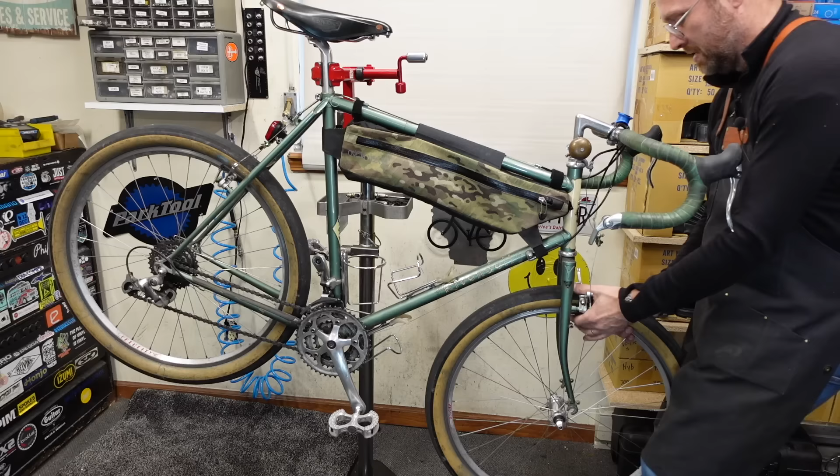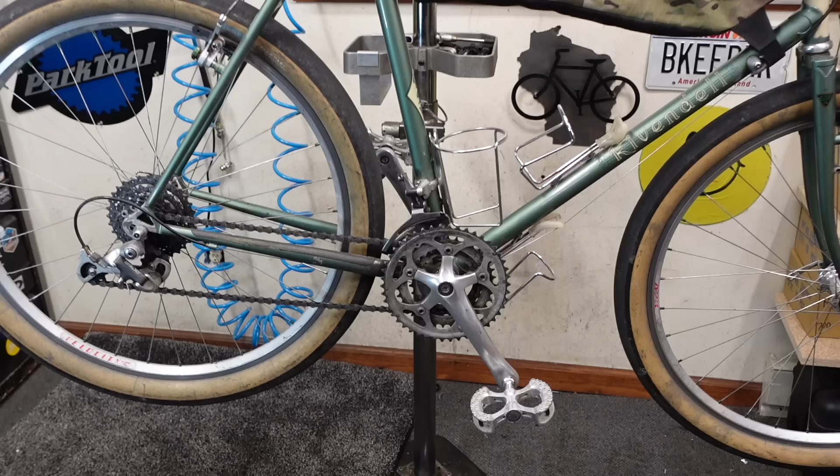So what we've got here is my 1996 Rivendell All-Rounder. I know I say this about all my bikes, but I think this is the coolest bike I have. All my bikes are super cool, but this one is really special to me.

This is the bike I've been using for touring, but it's built with very thin-walled, lightweight Reynolds 753 tubing. I think it's really cool that in the beginning of Rivendell, Grant Petersen wanted to continue to develop the Bridgestone XO1, and the All-Rounder is that bike. Essentially, it's a road bike built on the 26-inch mountain bike platform, so the geometry is pretty goofy on it.

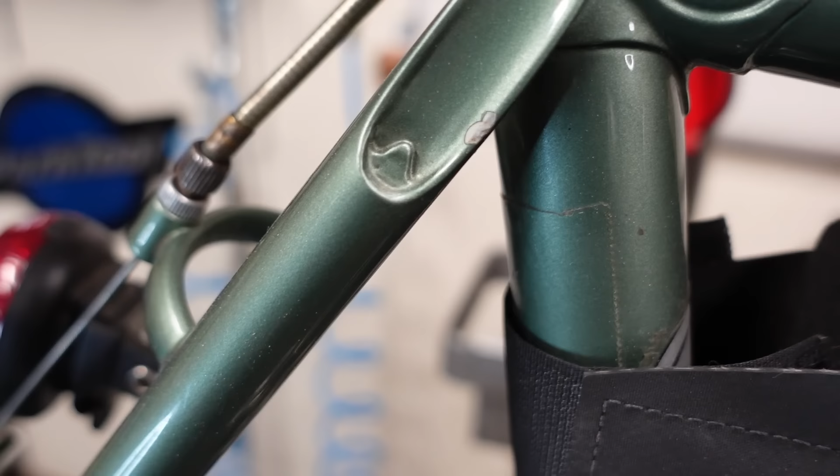I've got Rene Herse Rat Trap Pass 26 by 2.3 inch tires on it. These things float like a butterfly. This bike stings like a bee.

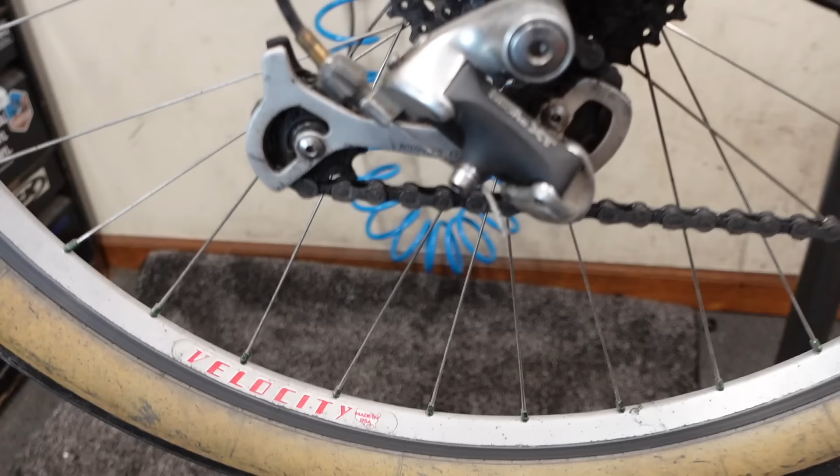However, due to the very thin tubing, it doesn't make the best touring bike. When I've got this thing loaded down, and if I get off the road, or even when I'm flying down hills, it gets a little noodly.

Many of you probably watched the video of me riding in the Black Hills, and this is the bike I did that ride on. It was fine, I got through it, but when I got off on that horse trail, I think if you listen closely, I even mention it. I just felt like I was stressing it and felt like I was gonna break something, and it just wasn't doing what I needed it to.

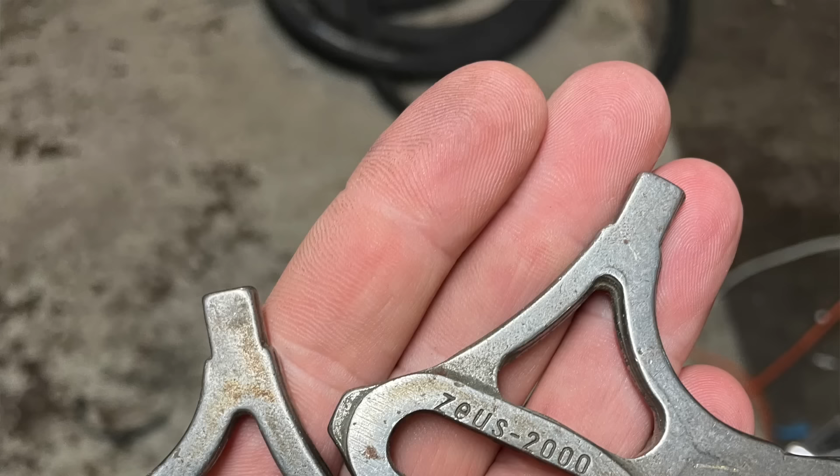So at that moment, I made up my mind that I'm gonna build an exact replica of this bike, only with oversized mountain bike tubing. So that's exactly what I did. I ordered a tube set and a bunch of lugs. I had some really cool Zeus 2000 rear dropouts sitting in a box that I found.

It's not a whole lot I'm gonna change. I have decided that I'm gonna increase the rake on the fork. Let's see if I lift this up, you can see this is a very sexy fork with this really subtle bend. I'm gonna give it more of a French bend and kick it out. So this is a 38 millimeter rake, I'm gonna kick it out to 45. So I'm actually subtracting 7 millimeters of trail.

That should help the bike handle a little bit better when I've got a front load. I'm gonna put some bags up front and a bag on the front rack. I think this is gonna be my main gravel bike after that.

So I'm gonna take these fenders off, I'm gonna take this front rack off, I'm gonna keep this bag on here. I might take the bag off for now, but it's gonna go back on the bike just because it looks so cool. But I'm gonna kind of strip this thing down.

I don't know if I'm gonna strip it all the way to the frame. It would help to have the frame up in a stand so I can measure things and make sure that I get my build right.

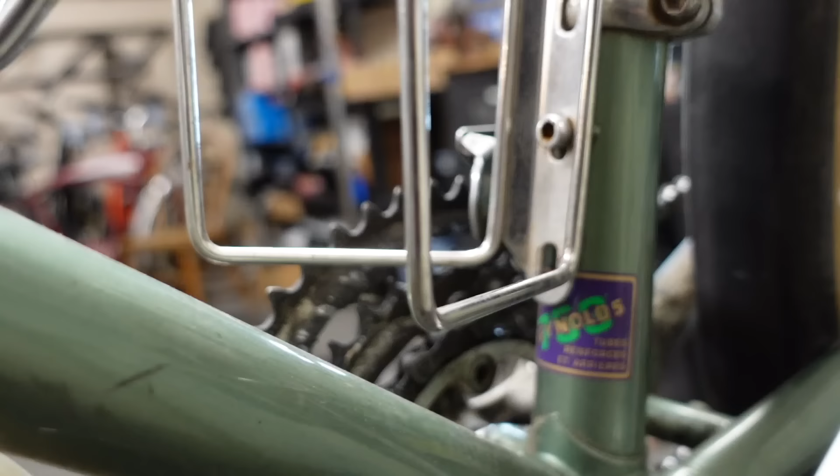But I've done a pretty good job of redesigning this bike. I went back to the original Rivendell readers, I think it was Rivendell Reader number 2, and I found the page with the geometry chart for this All-Rounder. I plugged all that into BikeCAD and designed the bike. I've got a nice digital drawing of it, and with that drawing, I can make a full-size drawing.

So this video is gonna be about me making that drawing, taking this bike apart a little bit, and setting up the jig to get started on the build. This is just the very beginning, first steps, like when you're thinking about building a bike, the planning, all of the effort that goes into designing the bike before you start mitering tubes and tacking things into place.

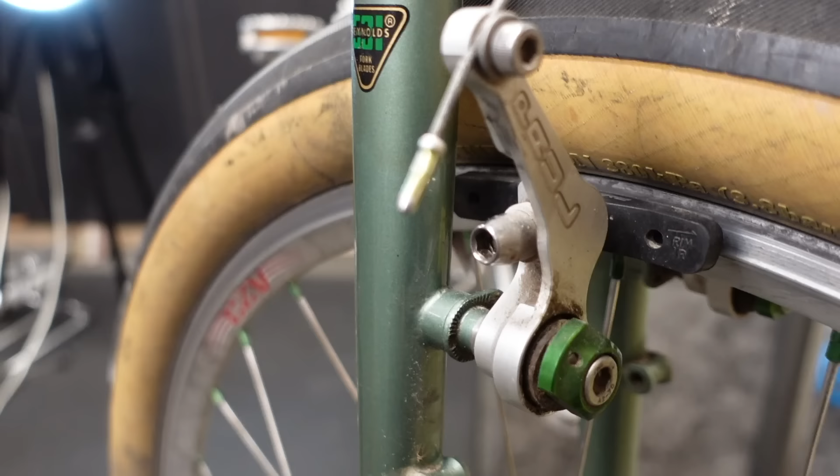I'm by no means a professional frame builder, I'm a hobbyist level frame builder at best. This will be my 3rd complete bike, my 5th attempt at a frame. I make a lot of mistakes, I learn as I go. This is a big undertaking for me, it's always a big undertaking for me to build a frame. So sit back, relax, and come along for the ride.

Get my lock off of here. Love these locks. Disconnect the brakes and pop the wheels off.

I think these super fancy Rene Herse fenders have to go first. Take those off, I think they're gonna go on the new bike.

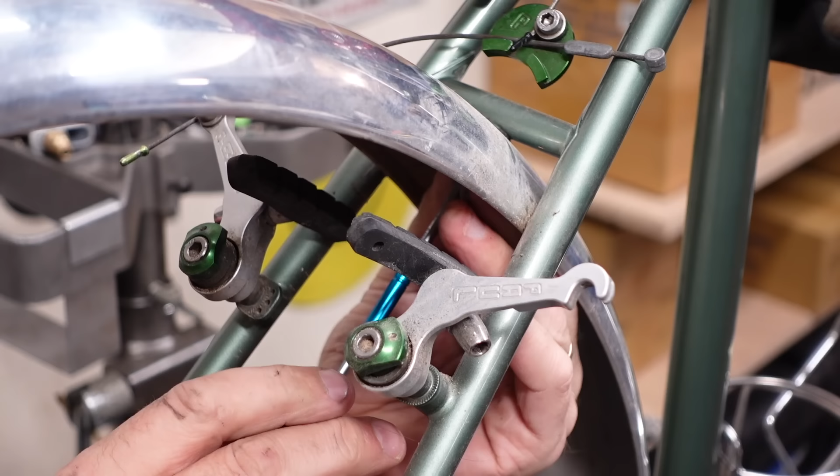All right, I gotta take my little problem solver bow tie guys off here.

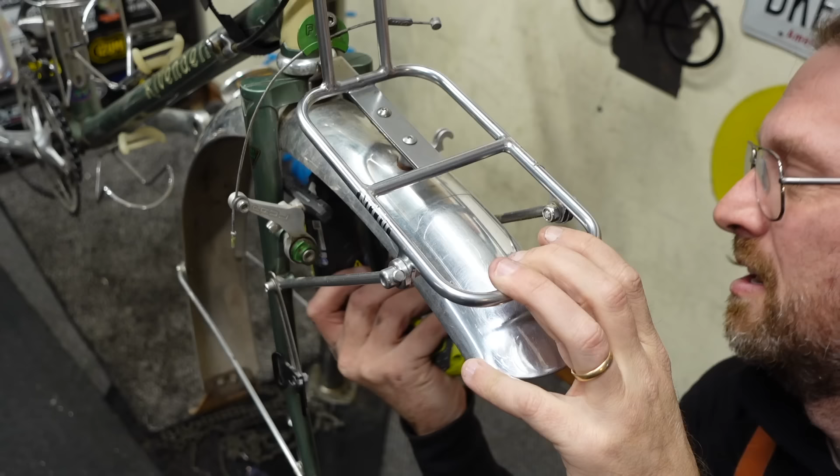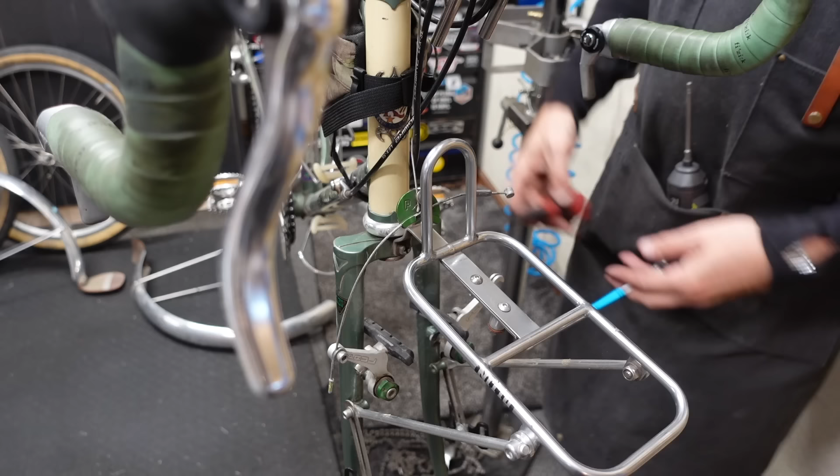So this bike wasn't really set up to be taking a front rack, or at least hauling a front load. It's got a pretty high trail, and I just don't think I'm going to be carrying a front bag on it anymore, so I'm taking the front rack off.

I'm hoping to build a custom rack for the new bike. Got all the stuff for it. We'll see, but this one would certainly do if I don't get around to it or I mess it up. Never done a rack before, so I'll hold all the hardware together so we don't lose it.

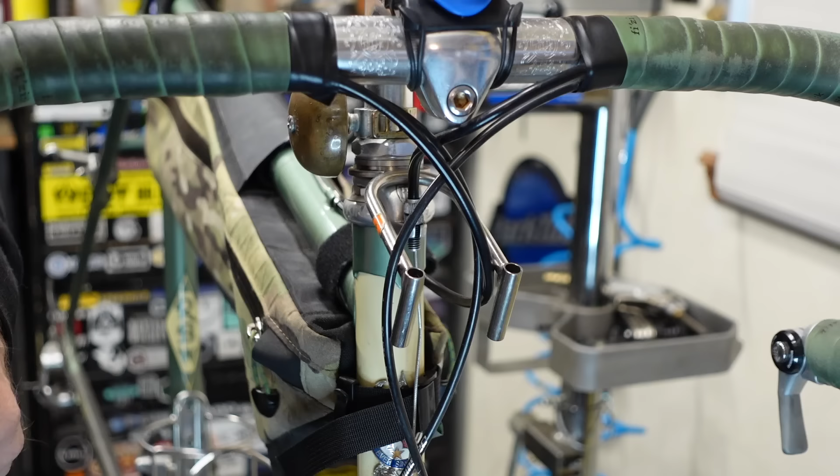If I don't have the front rack, I don't need the decaleur, so we'll try to get that off. Oh yeah, these cables are really short. Oh, of course, the Technomic stem - very long stem.

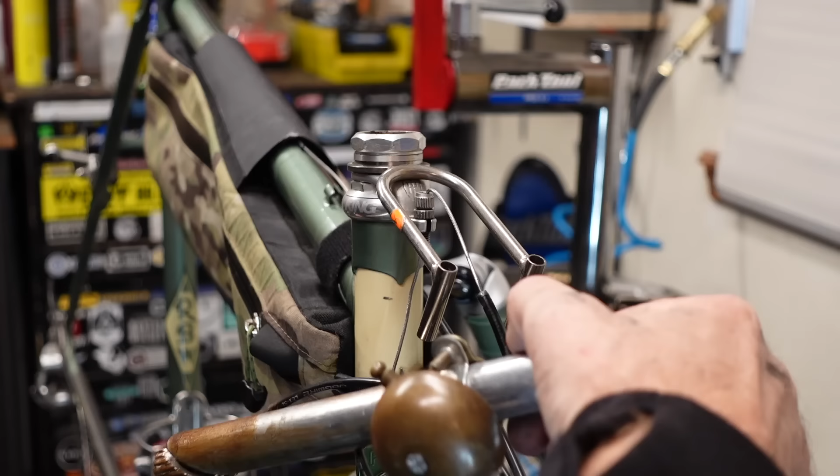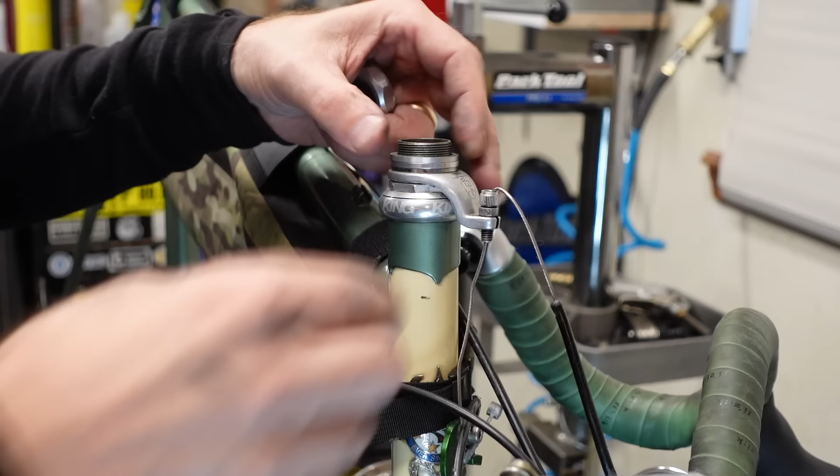I'm gonna need a spacer. All right, I couldn't find a keyed one, but I found an unkeyed one. I'm gonna put it in between the keyed ones. I don't know if that makes sense or not, but that's what I'm doing. Why not?

All right, that simplifies things quite a bit. Get this bike back into its more natural state as a lightweight all-rounder. It'll certainly look cool with the fenders on it, but I think it almost looks cooler without - it just looks sportier.

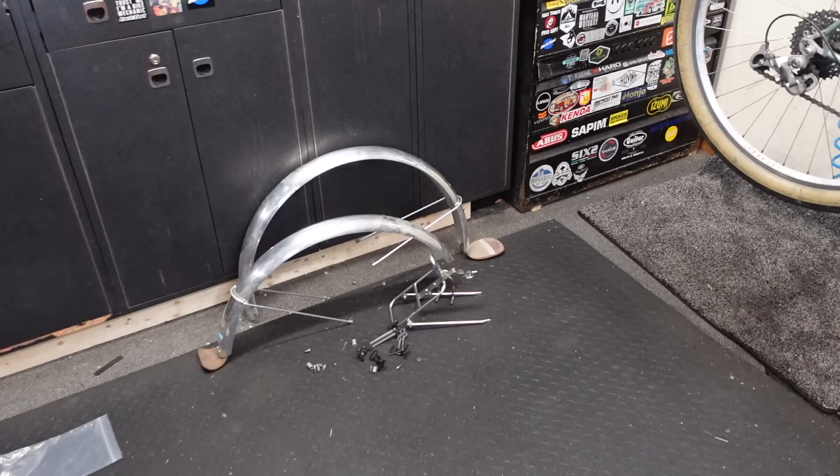Well, as long as I don't have to stay overnight and the weather ain't too bad, that's a pretty spry gravel bike now that we've got all of the touring bits off of it.

Here I have the original order for that bike right there, so we know it's from 1996 - that's pretty cool. And then I got it October 27th, 2019, so I've had it about 4 years.

I'm gonna open this up because I have my geometry chart there. Oh, hi Moon. So this is photocopy, volume 0, issue 0, and this is Grant explaining how he's launching Rivendell after the closure of Bridgestone America.

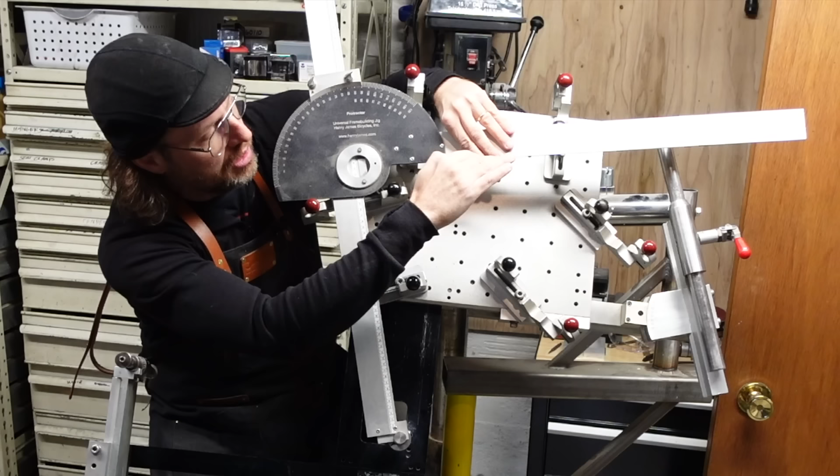And we've got this big old protractor here that fits on it, and if we loosen it up, everything kind of slides and you can get your angles this way too. So once we find our 72-degree seat tube, then we kind of know the horizontal tube, the top tube, and get those lugs set.

Once you get everything measured that way, you can set your brackets to get it in the rough position and start cutting tubes to length. Now what I like to do is mock up the whole front triangle, get all the miters cut, and make sure you get a good fit on everything before tacking in those first few tubes and building that front triangle. So I think that's what we'll start with. We'll get the bottom bracket in here, get the head tube cut, and start getting angles and things set up.

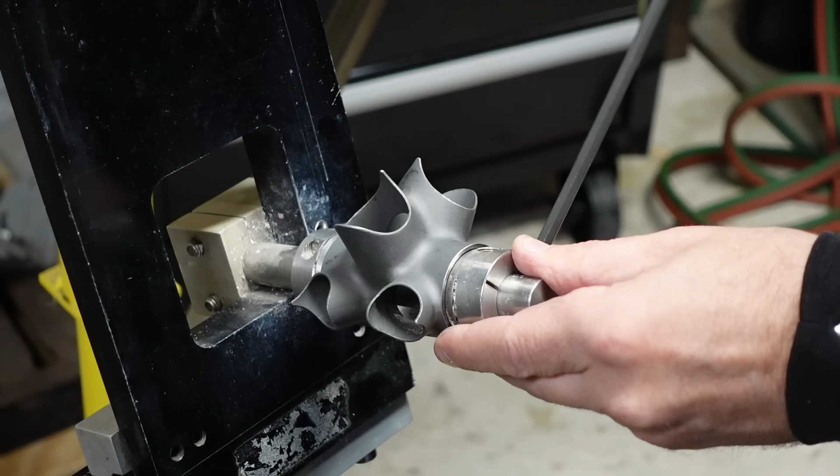Maybe mock up a few tubes - I have some scrap tubes. Sometimes I like to do that just to get things close and start dialing in the setup of the jig before we actually start hacking our real tubes and making some miters. So I just had a frame in here from a botched project that we're not going to talk about anymore. I think that this is actually in a really good spot - should be the same bottom bracket shell. They're just kind of wedges that are held in there. I'd like this bolt to be accessible from over here, so it's press fit in there and then tighten it down. It's not going to move one way or the other, but you can still kind of twist it.

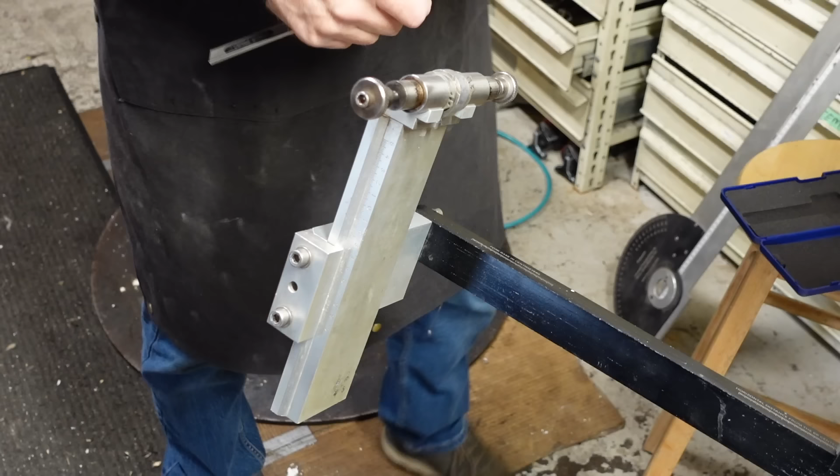Another fairly easy thing we can do to set up real quick, we can get the rear axle spacing set up. Zero this guy out and measure. All right, we're at 133, so that's really close. We want it 135. I think this screwdriver works - just a quick adjustment there. Measure it one more time. It's 133 or 134, try that. 135.2, it's got a little bit of a wiggle to it. Close enough. And then we'll dial these in a bit.

These are the dropouts I'm using - these are cool old vintage Zeus dropouts. I don't think I've ever seen a pair. They're Googleable, they're not that rare, but certainly a unique thing to this bike. Nobody's got Spanish dropouts on their adventure bike. Nobody but the bike farmer, at least.

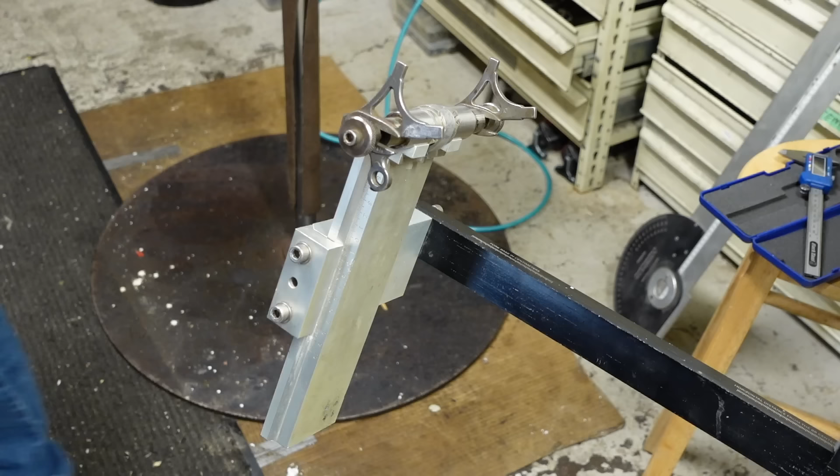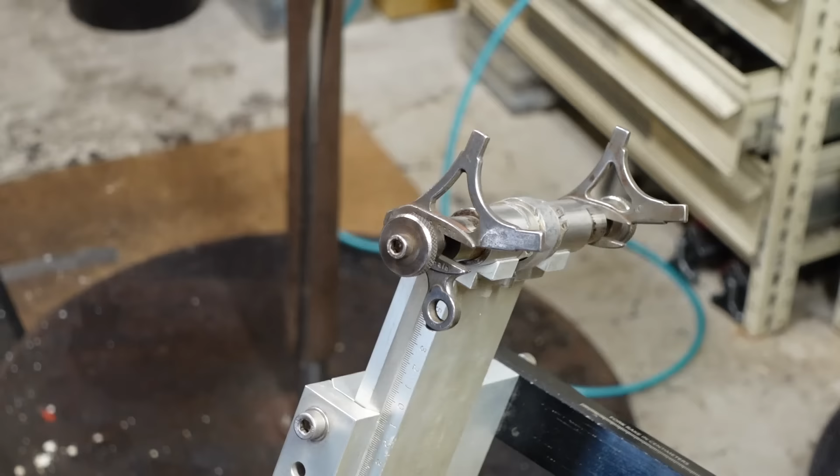And then we'll set our bottom bracket drop, which on this bike is going to be a whopping 45 millimeters, according to my drawing. So there's a little groove right here and then a gauge, and that is set at 45. So that's the bottom bracket drop, which means from the center of the rear axle to the center of the bottom bracket, there is a 45 millimeter vertical drop.

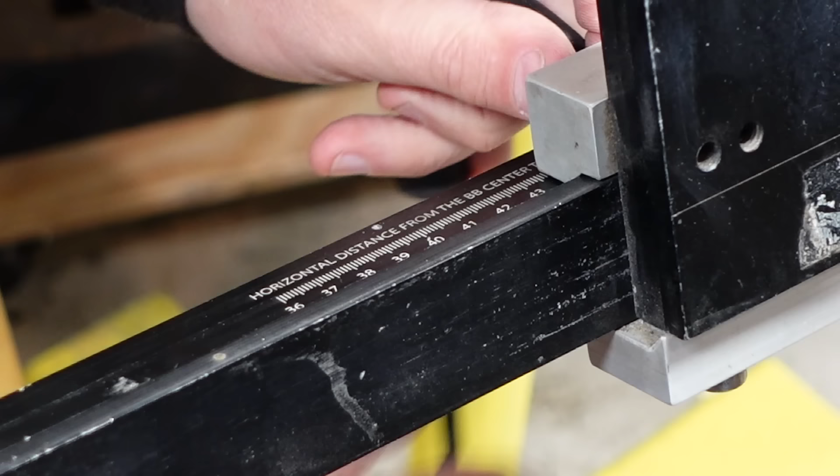Okay, and we can set our chainstay. So the chainstay length is here, horizontal distance from the BB center to the rear axle. For some reason I don't trust this one, so I'm going to measure it manually as well, but I'm going to go off the gauge to get started. We want this to be 42 and a half, which I'm showing is right there, if that's actually my mark. Like I said, I don't really even know how to use this thing, but it's good enough for who it's for.

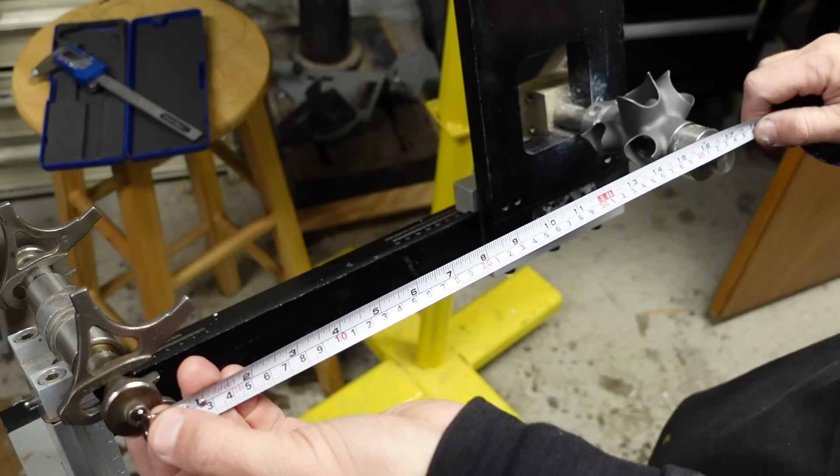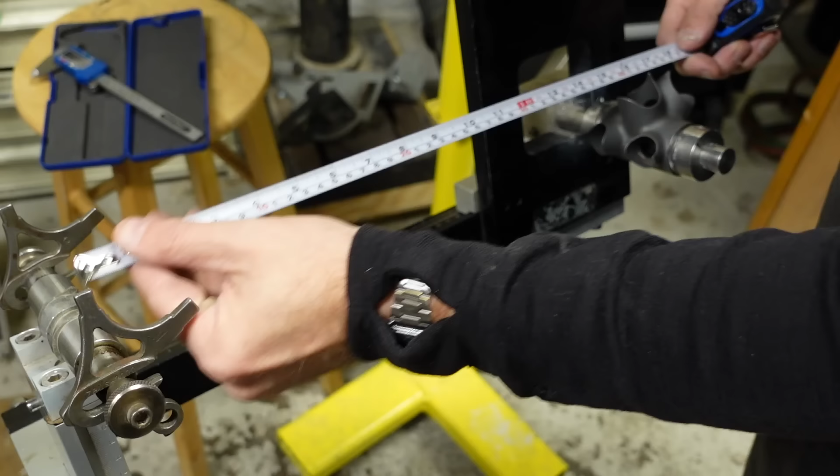So this is the distance we're going to measure - go from the center of that bolt to there. Yeah, so if I measure like that, I mean it's close but not quite. It's measuring like 43. What if I do center there? Yeah, it's probably right, pretty close. We'll double check that as we go too - we might find some clues along the way.

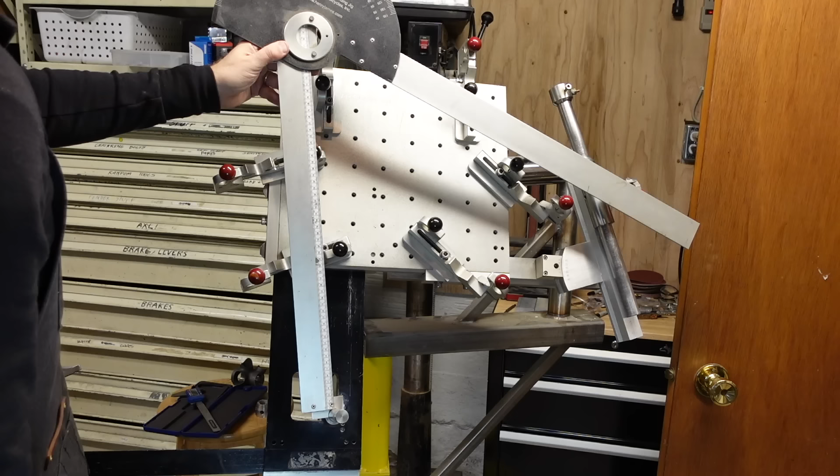Okay, we're going to make some - back this up a little bit here, take the bottom bracket out. Play with this thing a little bit. So let's see if I can make sense out of this. I'm going to go with, I think it's 58 and a half - so that's 58 and a half from the center of the bottom bracket to the center top tube. And then we've got to set the angle here, it's 72. I'll double check my drawing quick. Yep, 58 and a half - yeah, it looks like center to center. So we'll take this off for now. I'm going to take all these red guys off.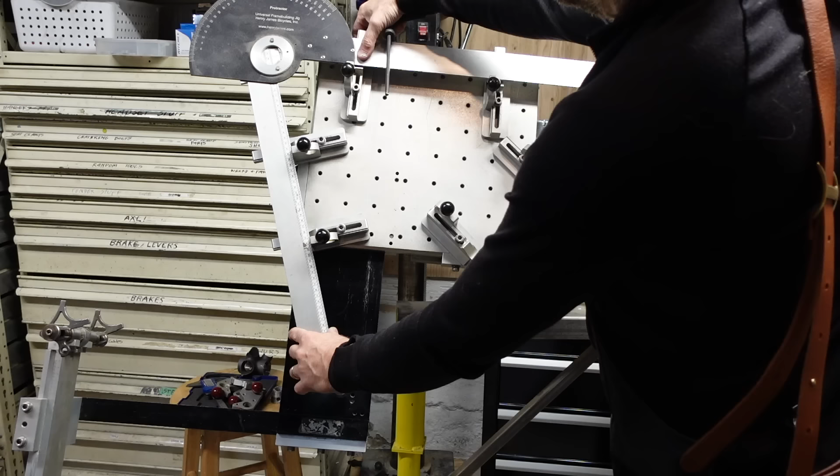All right, so now put our jig in here. A little bit of futzing and finagling. You can rest your top tube on that, and then your seat tube angle should be right there. Kind of get things as perpendicular as possible here. I think that's getting closer. Okay, seems about right.

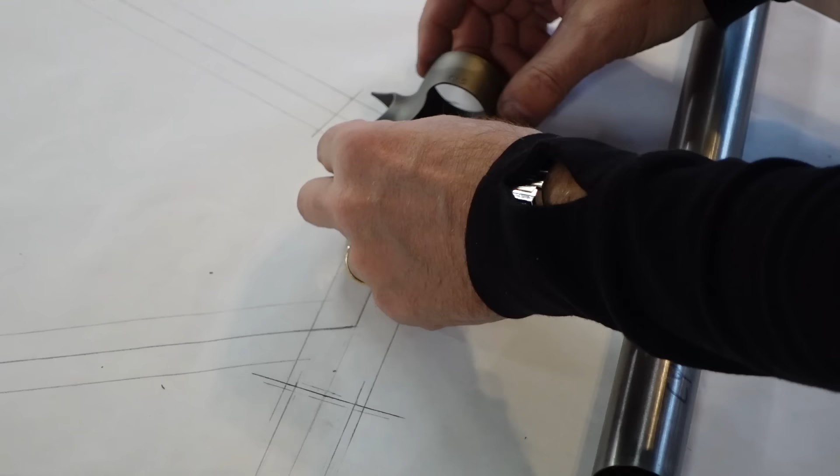Okay, over here on the drawing, we've got our head tube. And that's our head tube. You can see it's way bigger than it needs to be. I'm just gonna kind of double check the drawing just to be sure. I'm kind of eyeballing the lugs here, making sure that I'm going from the right lines. Things are gonna pan out for me.

I can always face it down a little bit. So I wanna cut it just a tad big, but that's where those go. So my lines are fairly accurate.

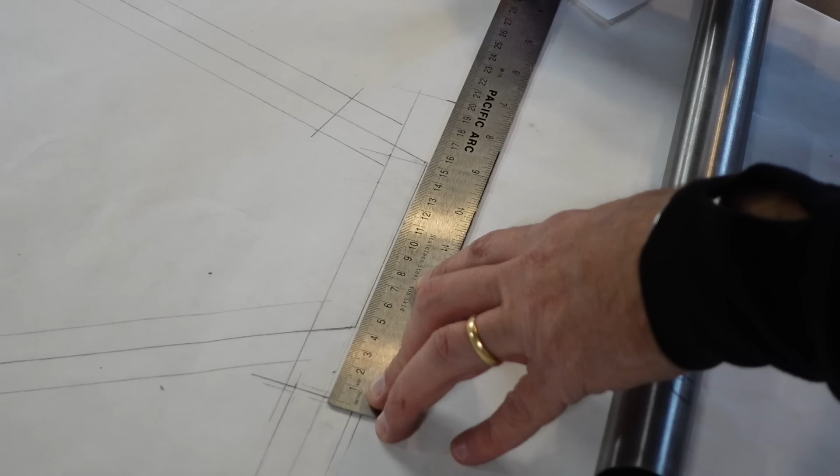And so I'll line that up, and I'm measuring. If I add a little bit to either side, I mean 120. Nope, that's not right at all. 200 millimeters is gonna give us a good millimeter or two on either side to face down at the end. So that's what I'm gonna do. I'm gonna go with 200 millimeters. Plenty of head tube left over if we mess it all up.

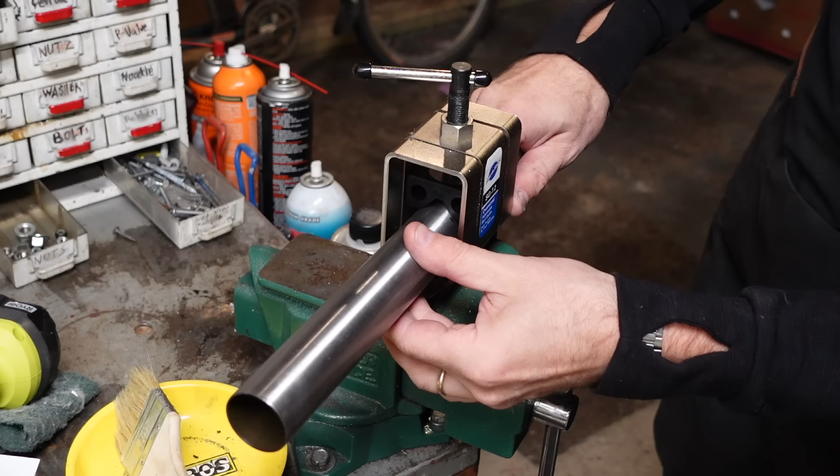I'm gonna mark right on 200. So, I gotta find my mark. Get this in here, get my saw guide. I think that's pretty good.

I take the easy way. Yeah, it's right on the money, right on the mark. Okay, go clean that up.

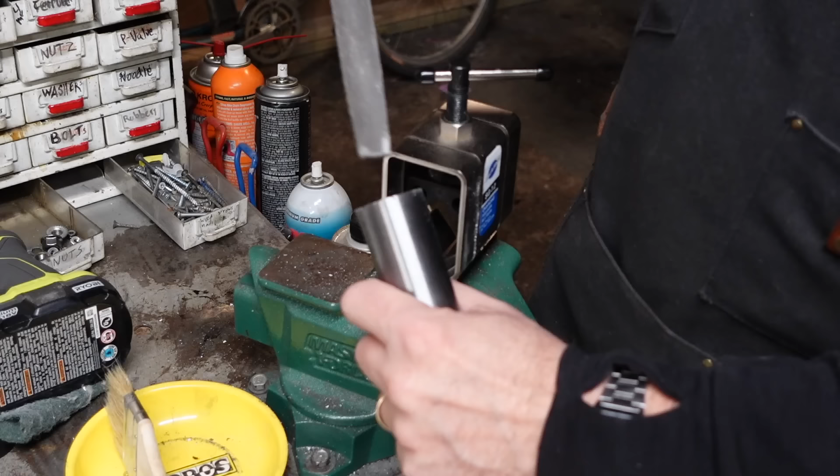Ooh, fits like a glove. Like I said, I have some extra tubes and kind of things sort of aligned.

How about we do this? Lock it down that way. So this whole thingamajobber goes up and down, right?

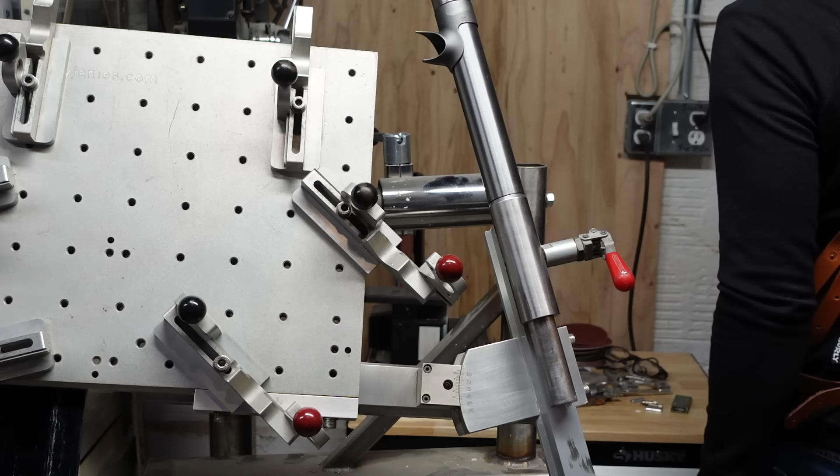We know this flat right here is gonna rest our top tube from our big protractor guy. All right, so we can slide a dummy top tube into that lug.

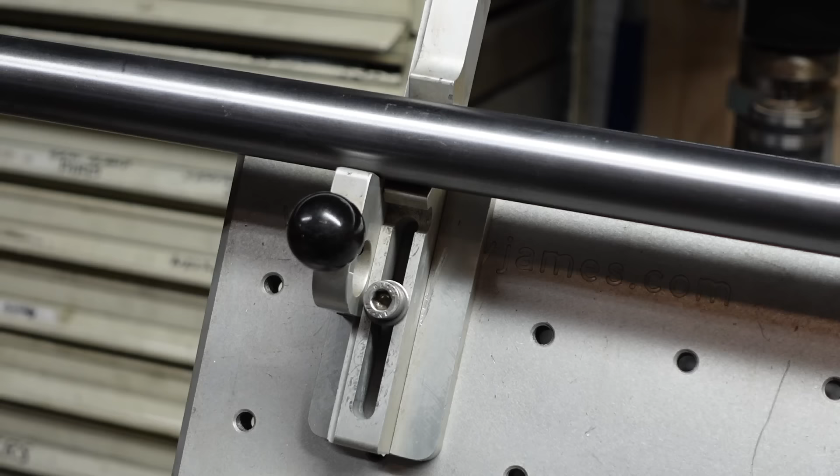We know from the big protractor guy, it lines up in that lug. Now we still have to miter that. We got to make a miter cut so it mates up really nice with the head tube inside there. At least for setting up the jig, you can get pretty close. Actually, I think it's got to come down just a smidge. All right, I got my head tube floating in space vertically in the right spot.

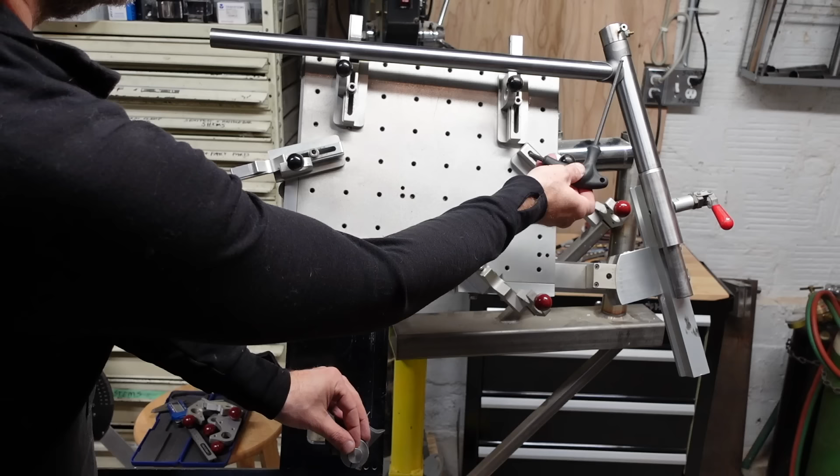We're still not sure about the horizontal distance. I think I've got a front center measurement back here, I just noticed. I might need to look up what the front center of this bike is gonna be. The front center is, I'm gonna get this wrong, it's horizontally from the center of the bottom bracket to the center of this intersection, or where these two intersect, I believe.

But we have the same diameter, so why doesn't that work? We have the same diameter top tube and seat tube, so we can use this as a dummy tube, but that's not working. That doesn't work. How come? Okie dokie, we're gonna try a different approach here.

I'm gonna pull this off even though I think it's in the right spot. Not hard to figure out. And then I thought these were kind of in the right spot too, but I'm thinking not. So try a totally different approach.

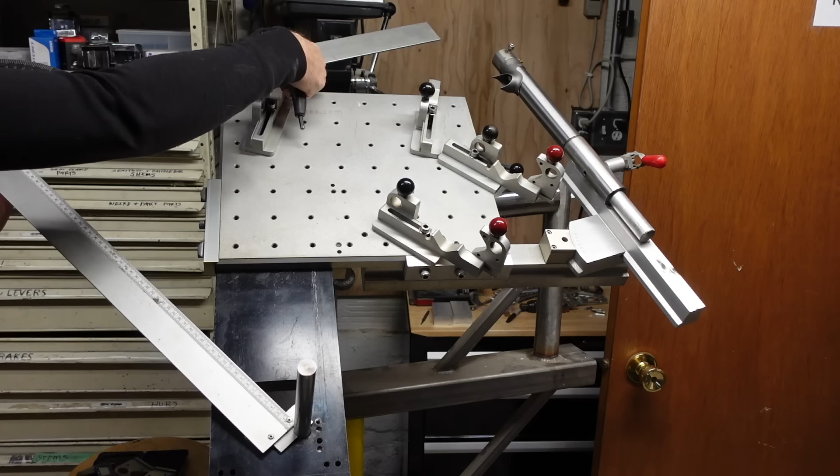So these I think I can just loosen up. I've got my protractor set here. And if I take everything off, it'll sit flat on the jig, okay?

Something like that maybe. We'll get there eventually. See what happens there. Seems a little better. Yeah, that's way closer.

All right, now we have to make some tweaks over here, I think. Loosen these guys. Okay, I'm not gonna move the red ones now, just gonna loosen the black ones to get this tube out. And this, I think, is gonna be an approximation that we'll dial in a little bit later, or at some point, I should say.

Okay, I think we got that figured out. So 72 degrees, we'll get this - the down tube is a little less important than the rest. And we just got to make the measurement across here as well, 585.

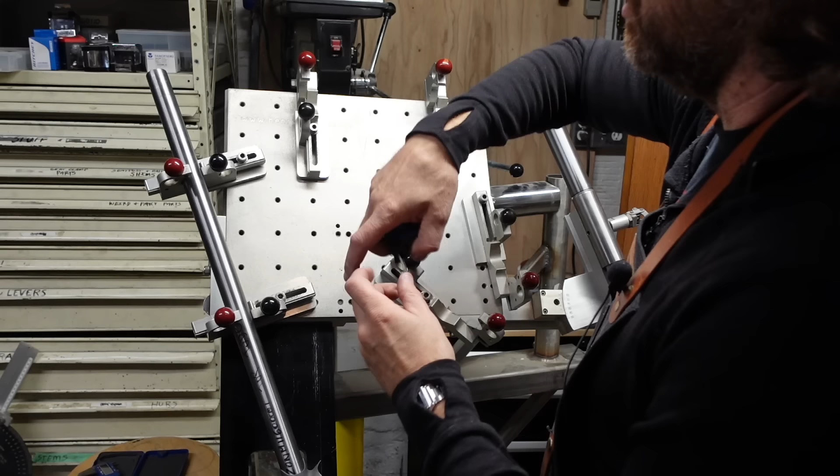Okay, so I got the seat tube back in here and then just kind of eyeball measured up to about 57 center to center. And then the drawing says from center at that junction to over here, it should be 585, and I'm measuring 575 or 570. So this all needs to come straight over, which is the front center adjustment, which I haven't looked up yet, and I will go look up. But I'm just gonna kind of eyeball guess it here for a minute, see how close we get.

Again, I don't even fully understand this measurement. It might need a little persuasion.

Okay, center of that tube to center of there. It's getting there, just a little bit more. And then we'll check it against the drawing here in a minute.

Center, center, center, that looks really good. That's gonna be super close. Well, that just moved it. We'll see how we do here. I'm gonna tighten things down just in case we're right on. Try it one more time here. I think it's gotta move a little bit. All right, I'm gonna go give it a check.

All right, trying a different approach with the protractor. This is not good content.

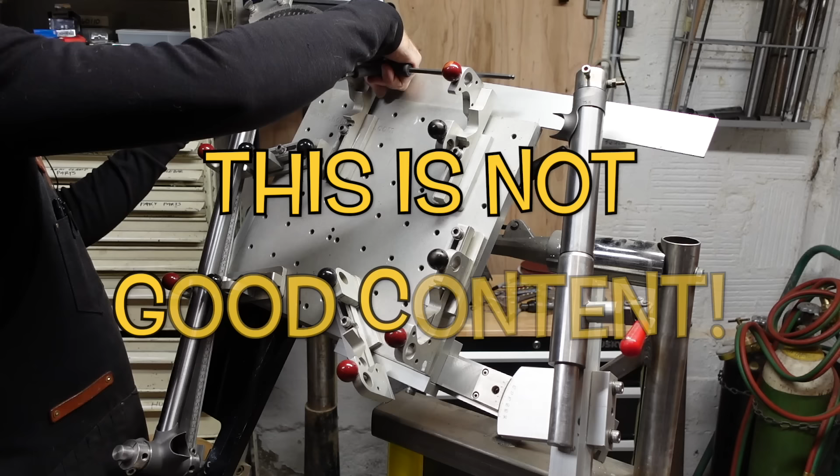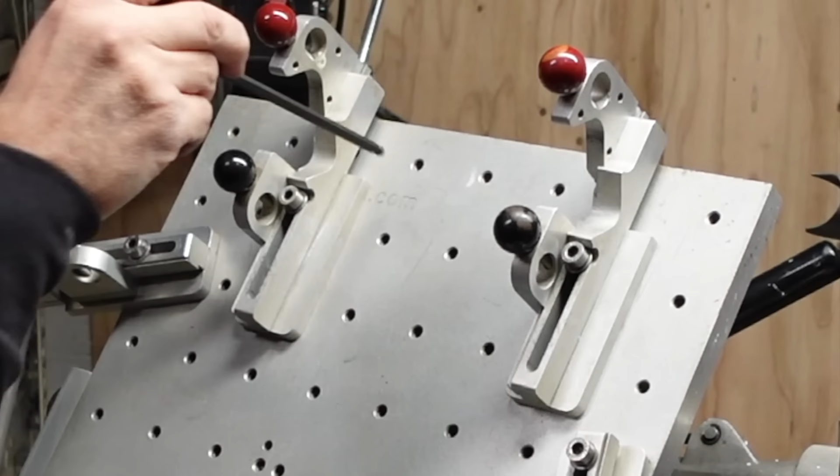All right, so okay, here it is. Finally figured it out. I don't know how to explain it, but these curves right here, the very center of these curves are in line with those brackets. So you can put your tube in there and hold it flat and align these guys to it. And then these will come down and hold that tube out in space, and all the tubes will be at the same plane. I hope I explained that right. It took me that long to figure it out.

Right now, things seem to be fairly good. I think I need to move this back down. So we need that to line up.

This measurement right on 585, and this should be 57, and it is. We are good to go. We got 73, 72, everything's tight. Don't worry about the down tube now. 61-ish. Go check the drawing.

All right, after some serious futzing around with this thing, I figured out how it all works, I believe. And this guy goes like this. Okay, so I set the seat tube angle at 72 degrees using this top edge as a reference point. Then I took this and I lowered it down until I'm measuring 57 centimeters center to center here. I double checked that, I made a mark and double checked that with my tape, and that all checks out.

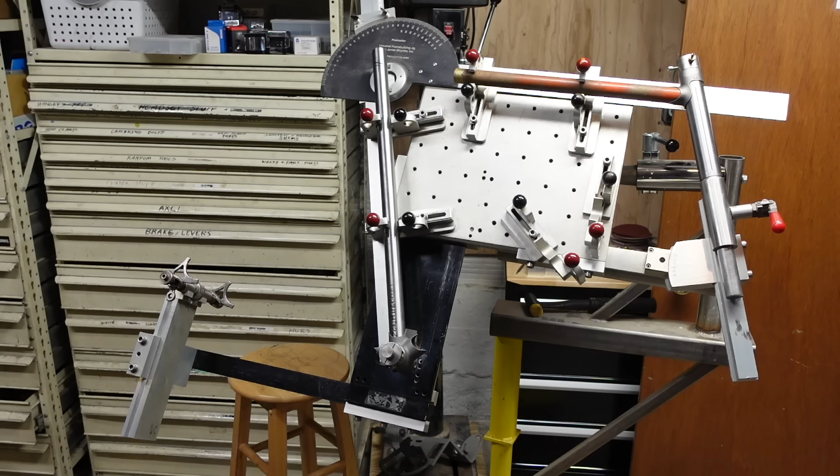And that's kind of relative. Seems a little long right now, but I have horizontal dropouts, so you kind of want them right in the middle, I think, of that number. And so that'll be close. But all we're concerned about now is the front triangle.

So I think the very first step is I'm gonna get this mitered into place, maybe. And one cool way you can do it with lugged frames is just put the tube in there and take a Sharpie and mark it from the inside of the lug, then miter it down from there. I might do that, I don't know which one I'm gonna do first yet, I'll have to think about that. So I think now we're ready to miter a tube or two and start assembling this thing, start mocking it up in the frame. So here we go.